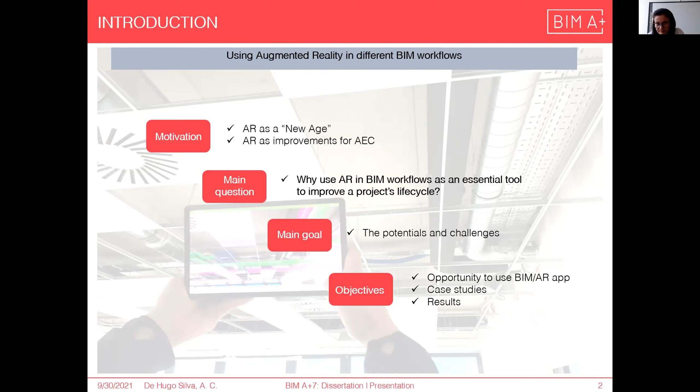According to Azuma, one of the most important developers in augmented reality, AR is a combination between the real world and virtual world that allows interaction in real time, and it's possible to record the real and virtual in 3D. It's available through multimedia, 3D modeling and real-time location tracking.

In 1968, Ivan Sutherland invented the first head-mounted display, and through this invention, other researchers started new research into technologies such as virtual reality, augmented reality, and mixed reality.

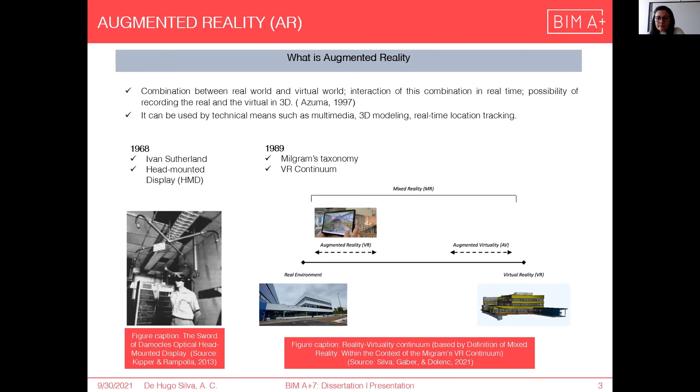You can see here the VR continuum created by Milgram's taxonomy in 1989.

For this research, I used Dalux software because the Kolektor company is responsible for the construction sites using it, and Dalux is currently one of the best AR software on the market. They use it for different kinds of applications.

Dalux View, Box, FM for facility management, and Field. View is more useful for construction sites because it's an application for mobile devices, while Box, FM, and Field are more for the BIM coordinator and BIM manager.

All of this information is available in Dalux Cloud, and you can share it online at all times, along with all the data.

BIM workflow is divided into 4 different phases related to the BIM life cycle: pre-construction as a 3D phase, construction as a 4D and 5D phase, handover for facility management as 6D, and operation and maintenance as a 7D phase. Here are some benefits of augmented reality in each.

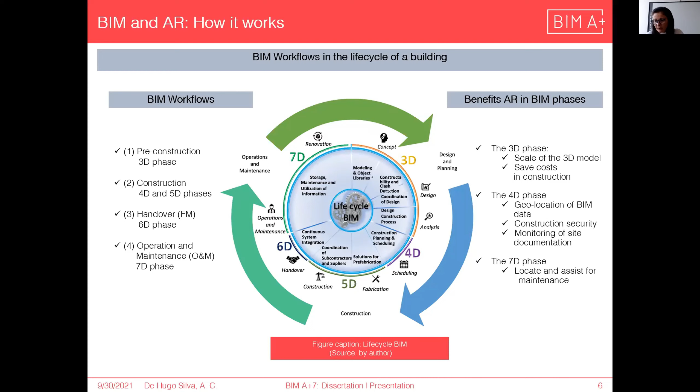This is the first case, about a section of access roads for the construction of the second railway, showing the proposed process and workflow. Here the workflow is in the post-construction phase, and I chose this case because it's a large scale infrastructure project and an opportunity to use the mobile device with an AR application.

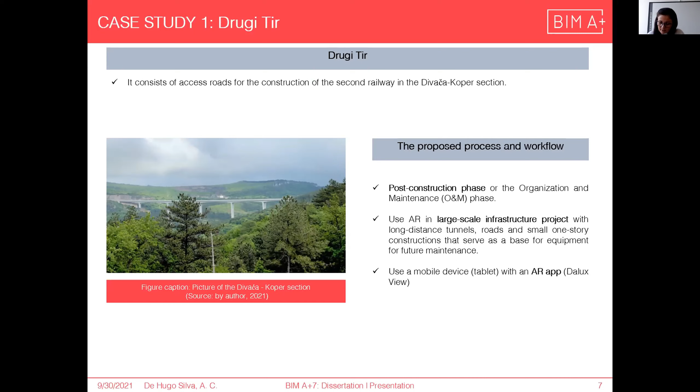It's a big construction site. I used 2 points and measured the distance between them, but here I can explain just one, because they are similar in terms of benefits, challenges, and results.

In this picture, on the right side, we can see point 2 with the georeferencing report in Dalux Box. The second and third pictures are basically the same, but letter C is a zoom of the 2D model location in Dalux Box.

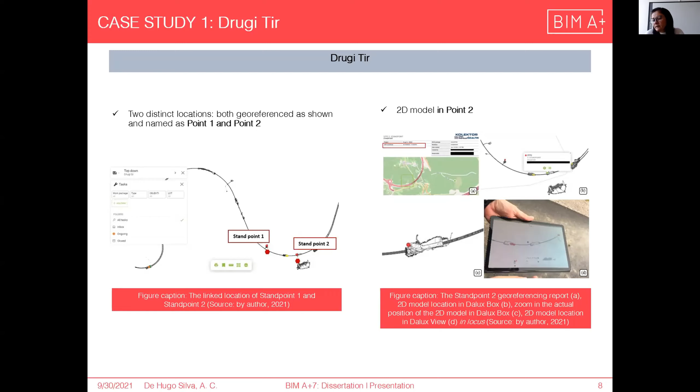The last one is a real application at the construction site through Dalux View on a tablet. Here we can see the integration of real-time visualization in 2D and 3D model as IFC at the same time through Dalux Box.

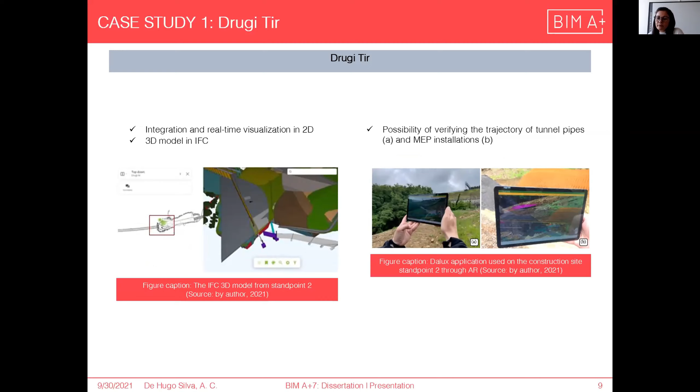And here, the real experience in augmented reality in this construction site, it's possible to verify the trajectory of tunnel pipes and MEP installations. The challenges and benefits: challenge, difficult finding the correct orientation, determining the location, and the sunlight reflected on the tablet screen, and difficult to move and rotate the 3D model in AR.

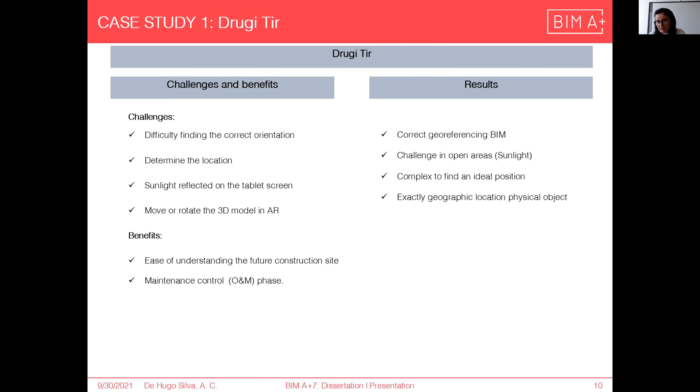The benefits is to understand the future construction site and the maintenance control, and the results are correct georeferencing BIM, challenging open areas because of the sunlight, complex to find an ideal position in exact geographic location of the physical object.

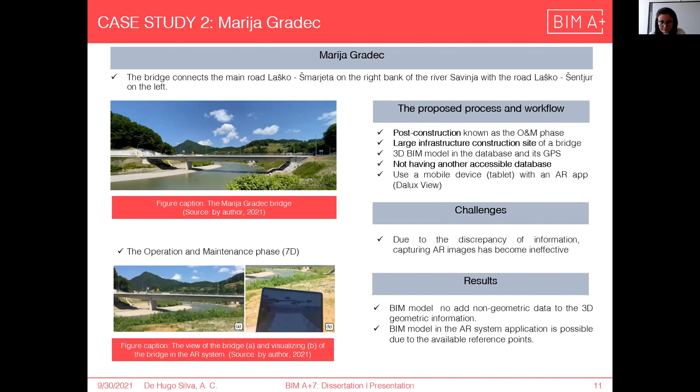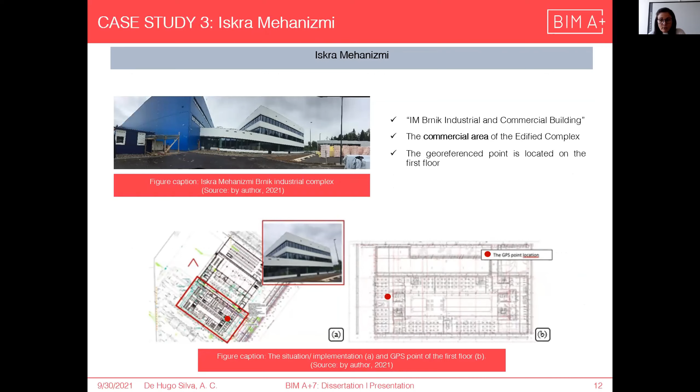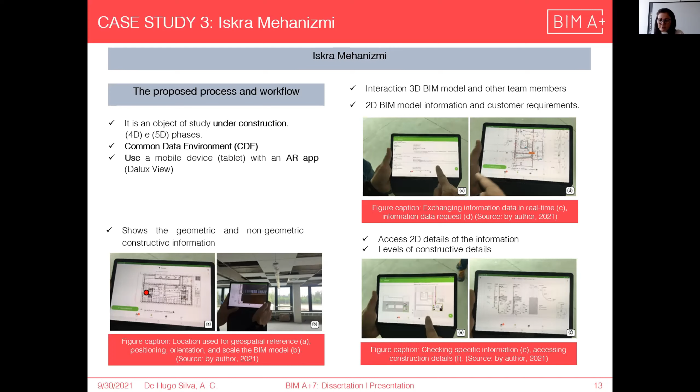On the top in this picture, we can see the possibility to exchange information, data in real time, and the other one, letter D, it's about information data request from that, I don't know if you can see the orange rectangle. And below, you can check specific information and access construction details, and go on.

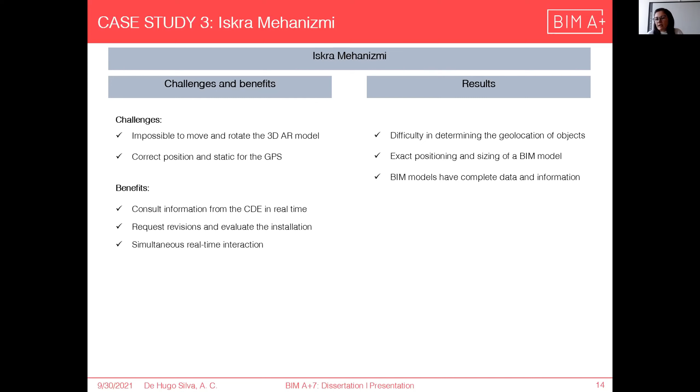Challenge: it's impossible to move and rotate the 3D AR model in correct position and static for the GPS. And the benefits: consult information from the CDE in real time, request revisions and evaluate the installation. And the results are difficult in determining the geolocation of objects because there are too many points from other objects there, and exact position and sizing of the model. And BIM models have complete data and information.

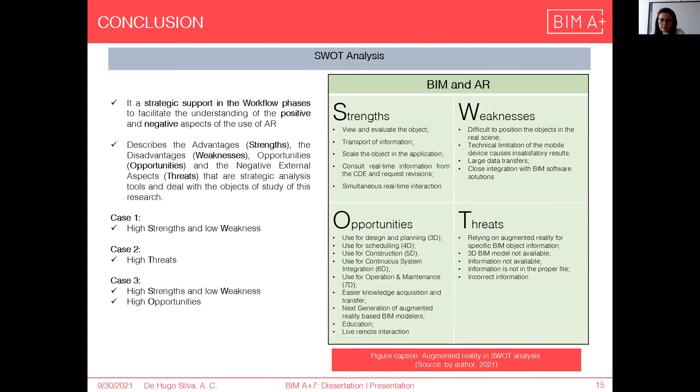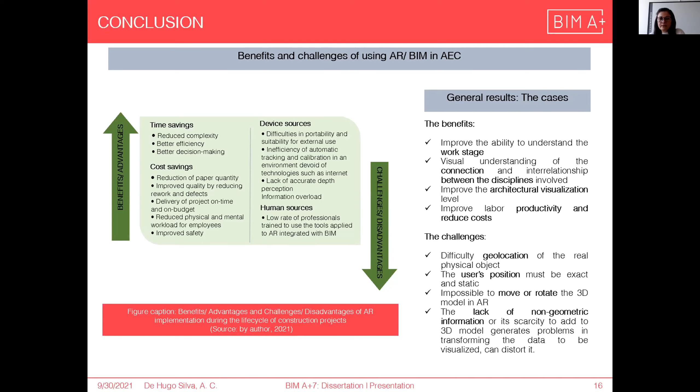I used SWOT analysis as a strategic support in workflow phases to understand better the positive and negative aspects of using AR for the 3 cases. And here in this table I'm compiling the general results from those 3 cases for benefits and challenges of using AR in BIM.

The conclusion to answer the main questions: augmented reality allows designers to place the virtual construction schema in a real physical environment. Through AR, it's possible to obtain a particular function, which is the instant visualization. And augmented reality contributes to fill gaps between planning and execution.

And some suggestions for future development are improving the understanding of the information transfer processes to direct them to each phase of the BIM project, enhancing software solutions, and a possibility to explore an alternative information flow for generating or updating data and information in a real 3D space, via mobile devices, not just only on 2D computer screens.

And in the end, this research is already published as a chapter of a book with the same name, using augmented reality in different BIM workflows.